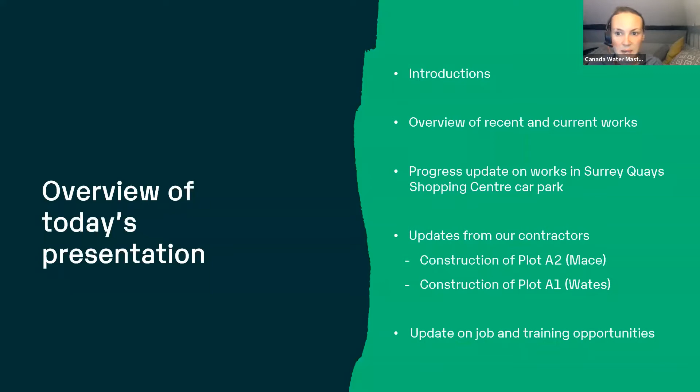I'm then going to provide an overview of recent and current works and let you know what's been going on in Surrey Quays Shopping Centre car park over recent weeks. At that point, I'll hand over to Emmeline from Mace and then Ollie from Wates. They'll give you an update in more detail on the construction of plots A2 and A1 of the Canada Water Development.

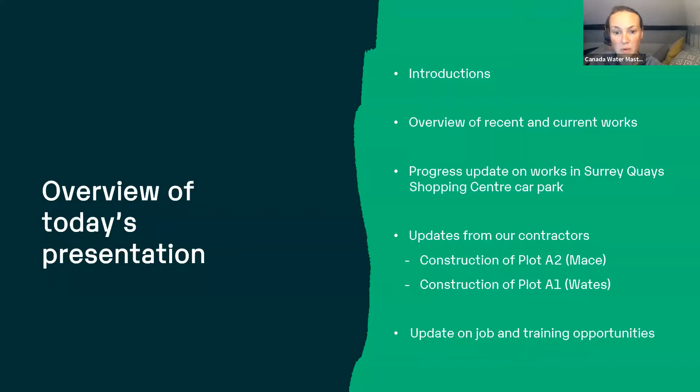In terms of who we are this evening, my name's Sarah Ward. I'm the Construction Neighbour Liaison Manager for the Canada Water Development on behalf of British Land. My role is to work with our contractors, of which there are quite a number, and more will come to site over the coming years, to really make sure that we're communicating and liaising with the community in the best way that we can. That includes our immediate site neighbours, the wider community who are passing through the area or using the area for facilities, and those who are just generally interested in what we're up to.

In addition, in the event that an issue or a concern or a question arises, I answer it as best as I can, and when I need to, I speak with our contractors and I make sure you get a quick reply, and if there is a concern or an issue, that it is dealt with quickly.

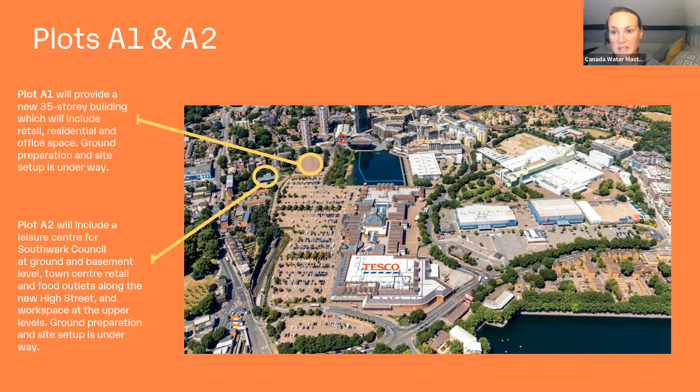In terms of the wider Canada Water Development works, you may be aware that the former Rotherhithe Police Station demolition was completed in July of this year. Moving down to where the interim petrol station is, you may be aware that that opened in June and is now operating as a fully functioning petrol station. Over to the right-hand side, top of the screen, you have plot K1, which is near Alfred Salter Primary School and off Roberts Close. We expect the construction of that building to begin either later this month or in November, and there are 79 affordable homes being delivered there.

If we move down now to Printworks and we just cross over the street there, we've got Goldris working there. They have been for some time, and they're building a basement for a below-ground electricity substation for UKPN. Then moving down right to the right-hand bottom of the screen, you may be aware that TEDI London are now operating a higher education campus. They took their first intake of students and they've been open since last month.

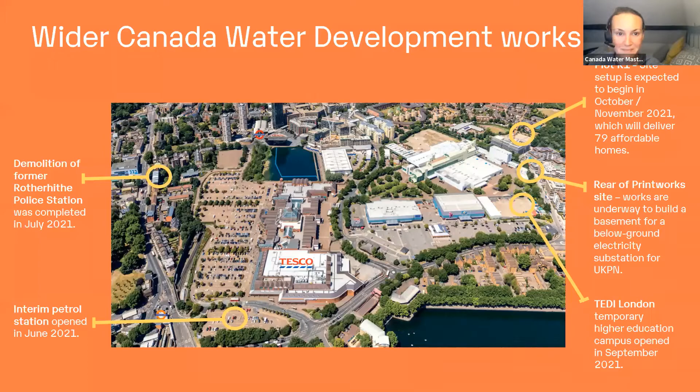Now to talk briefly about the works in Surrey Quays Shopping Centre car park. First of all, we'd like to thank you for your patience whilst these works have taken place. You may be aware that this week, Mace and Wates have been installing hoarding along Deal Porter's Way and around the rest of their sites, permanent hoarding that will be in place for the duration of the build for plots A1 and A2. You may also be aware that since Monday, the entry-exit point, which is close to Canada Water Library on Surrey Quays Road, Deal Porter's Way Junction, has been exit only. Actually overnight, tonight and tomorrow, it's closed to remove barriers. Again, we thank you for your patience here. That will be reopened, we hope by Saturday, but certainly by the beginning of next week.

In terms of pedestrians, of which many pass through the shopping centre car park, you may be aware if you walk through the site that the reopened footpath along the edge of the dock is being used to full effect now.

We do still have some barriers in place, and you may have seen that we've got seating still to install, benches. We'll share more on that as soon as we can, but we're expecting that to take place at the beginning of November.

The final update here is around footpath resurfacing works. At the bottom of plot A2, which is near Hothfield Place, we've been undertaking some resurfacing works there. We've retained access to Hothfield Place, and again, we thank you for your patience whilst the diversion has been in place.

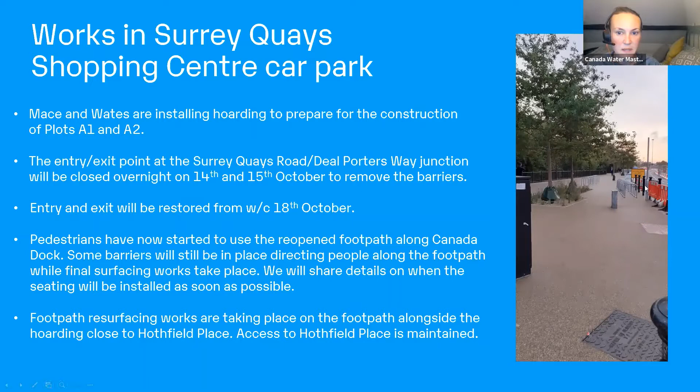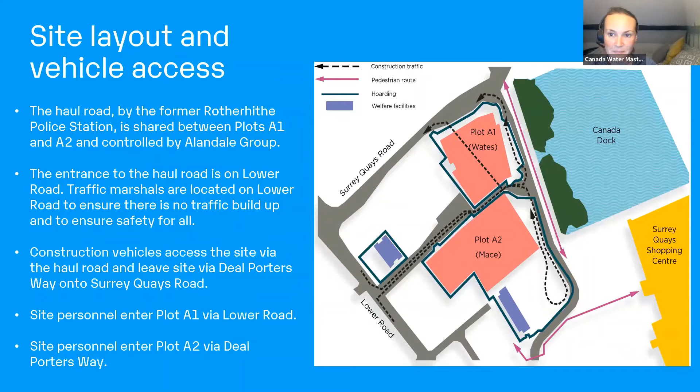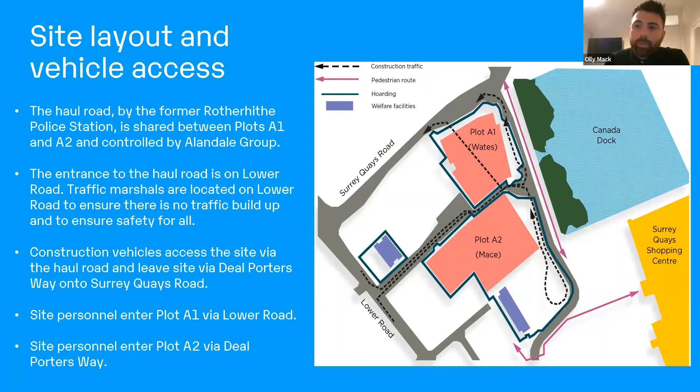Good evening, I'm Ollie Mack. I'm the project manager for Wates Construction, and we'll be undergoing the work of plot A1. I'm going to take you briefly through the logistics for both A1 and A2.

As you can see on the image on your screen, the top right plot, which is highlighted, will be the Wates Construction site of A1, and south of that is plot A2. The overall logistics is run by a haulage road, which runs between Lower Road and Porters Way. Construction traffic entering via Lower Road, between us and Mace, will travel up the road and will exit either left into the Wates Construction site or right into Mace.

As Sarah's mentioned in the other slides, there's currently a hoarding going up on Porters Way, segregating public traffic and pedestrians from the sites to maintain security throughout the build. Construction vehicles leaving both sites will exit via Porters Way onto Surrey Quays Road, turning left.

Site personnel for plot A1 will enter via Lower Road at the bottom of the screen, and there'll be a welfare set up there on the site of the former Rotherhithe police station. For plot A2, site personnel and visitors will enter via Porters Way, which is located at the bottom right of the image you can see.

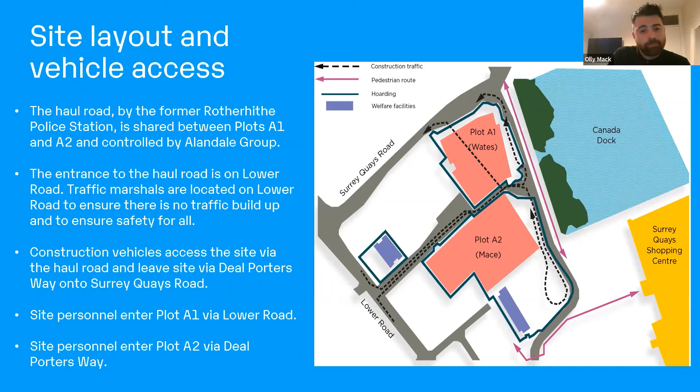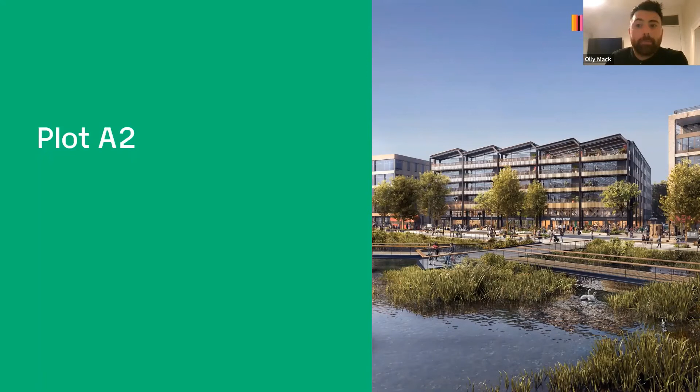Thanks, Olly. Good evening. I'm Emmaleen Mayell, Community and Skills Manager at Mace, and I'm supporting Neighbourhood Liaison and Communications for plot A2. We took over the site at plot A2 at the start of October from Calbray, and they continue to work on the site as a subcontractor, with Mace as the principal contractor responsible for delivery here.

As Sarah already mentioned, plot A2 will provide some commercial office space, retail and hospitality units, and a leisure centre for Southwark Council, including a swimming pool.

We have a small team on site at the moment, and this will grow over the next couple of months as our site welfare facilities are constructed to the south of the site. These will be fully established by January, and the majority of our project team will be working on site full-time from early next year. Next slide, please.

So the current activity on the site: we started piling works Monday of last week. A brief overview of what that involves is drilling into the ground to create foundations for the structure of the building broadly. This can result in a little bit of noise, dust, and vibration in the immediate vicinity, and we try to mitigate against this as much as practicable.

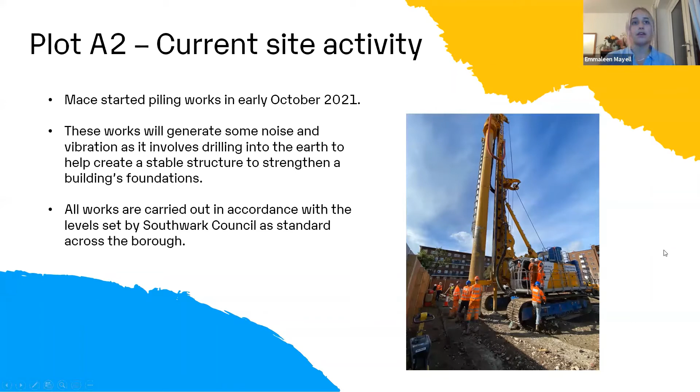Looking ahead for plot A2, piling works will continue into the new year. We'll start bulk excavation in January as well, with new plant on site to do this, as well as lorries to remove the excavated materials.

We're also erecting tower cranes in February of next year, shown as the 3 green dots on that plan there. These will be operational throughout construction, up until 2024.

We've also briefly mentioned some of our community engagement activities. Alongside British Land, we'll be delivering initiatives for the duration of our time at Canada Water, including community investment, fundraising and educational activities, as well as engaging local people around skills and employment. Our first initiative is a site visit with students from Bacon's College, a local college, organised through the Construction Youth Trust.

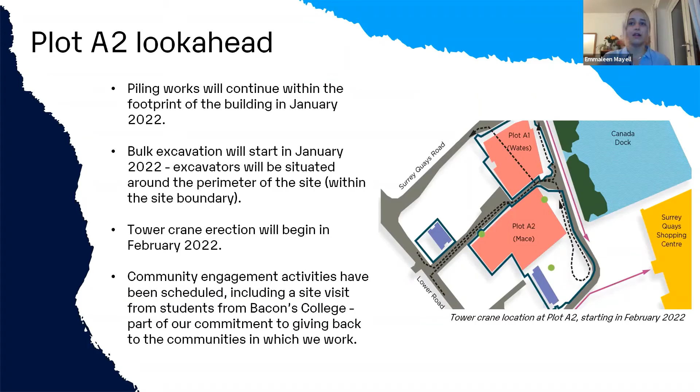We'll keep the community up to date with any upcoming activities via our notice board and other Canada Water communication channels. Thank you, and I'm just going to hand back to Olly again to go through plot A1 with you.

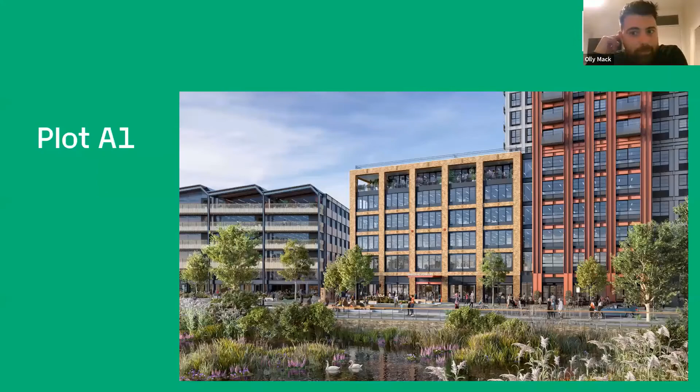Just an overview similar to what Emmaleen presented there for A1. We've commenced on site as of September 21, and our completion date will be October 24. As you can see, the project includes 186 residential apartments over a 35-storey tower, including 178 homes for private sale and 8 homes for shared ownership.

Following the residential tower, there will also be 3 cores of 6-storey commercial space and retail at the lower levels. There's a shared single basement spanning the whole site between the residential and commercial blocks. The 4 retail spaces will be around the surrounding section of the bottom ground floor.

Next slide, please. For upcoming work, similar to Mace, Wates are currently preparing the foundations for our welfare facilities, which will be located on the former site of the Rotherhithe Police Station, as mentioned previously. We will also begin piling works at the end of October, using exactly the same system as Mace in terms of what we're doing with the piling.

Again, it does generate some noise and vibration, and we're following the same guidance from Southwark Council in terms of environmental monitoring. We have a joined-up approach with Mace and other contractors on how that's managed and monitored, and the works are carried out in accordance with the levels that are set.

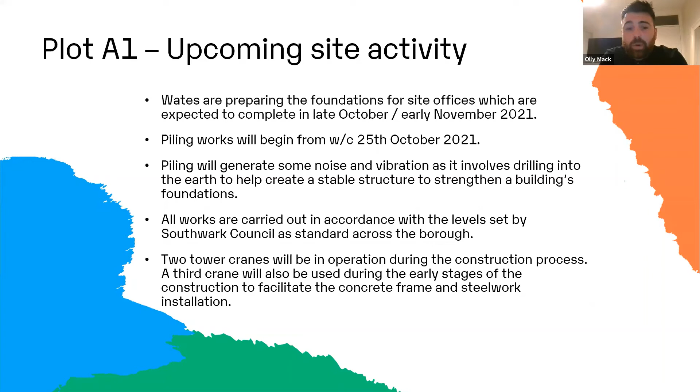This slide just depicts where the welfare facility is going to be located, at the old Rotherhithe Police Station on Lower Road. This will be a 3-storey temporary cabin setup, and this is where all of the Wates staff and visitors will enter the site via Lower Road.

Again, to limit the impact we're having on the community, we're having no parking at all, and we have supply chain and our staff using public transport, or where possible bicycles, etc., to get to the office and get to work.

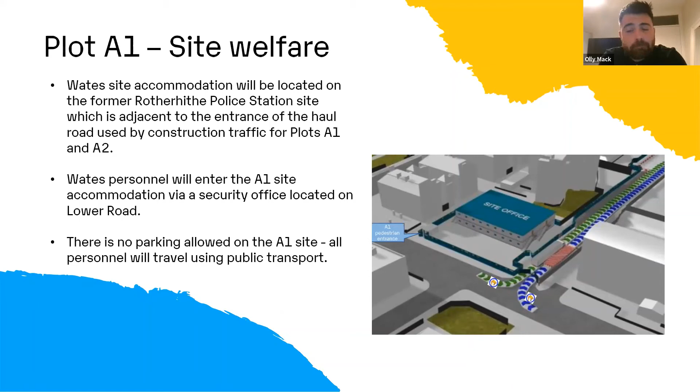I just wanted to talk a little bit now about our common working practices, around our working hours and our environmental monitoring. We're working standard construction working hours in Canada Water, Monday to Friday between 8 and 6, and on a Saturday between 8 and 2, with no noisy works before 9. We do try to avoid Saturday working as far as practical.

In terms of communicating where things may happen out of hours, that might be delivery of a large machine, for example, that's required under police escort at a particular time of day, usually to avoid peak periods, or when construction activity is such that once it's started, it can't stop. These are rare occasions, but it does happen on occasion.

We do update our working hours post, which is on our website. We are conscious that not everyone has access to the internet, so as far as we can, we use our site signage as well, so people will see that if they're passing. We provide advance warning if we can in writing through newsletters and so on, particularly for our immediate neighbours. And if we're affecting a large number of people, we would share it on our social media channels as well, so that would tend to be on Twitter and Facebook.

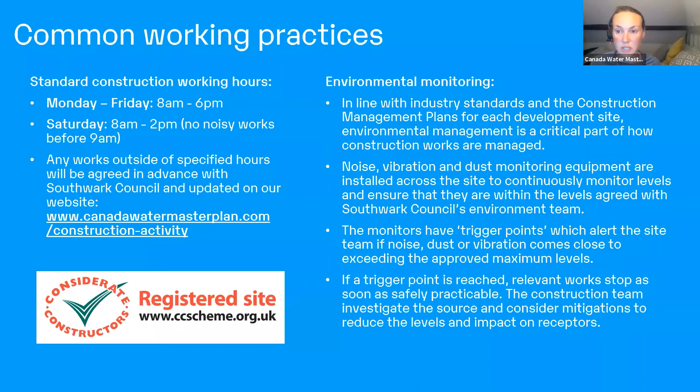We've got live monitoring equipment all over the site in terms of where live construction is taking place. What happens is if site activity, be it dust, noise or vibration, reaches a level that isn't acceptable or is coming close to that, then the team on site will receive an immediate notification, at which point they will take action to make sure the levels reduce and we stay within what is approved. So it really is a live process that is handled by the site teams.

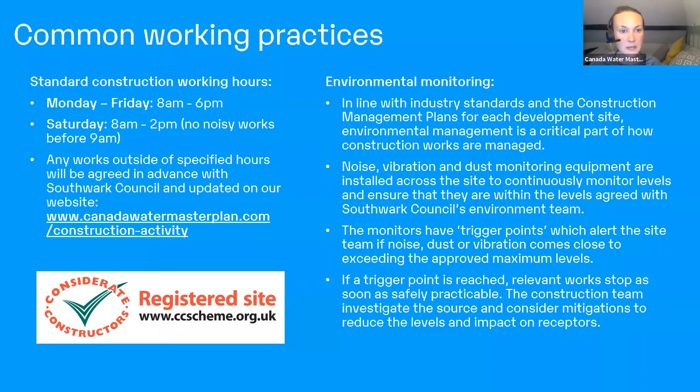Just wanted to wrap up by talking a little bit about jobs and training opportunities. There will be more of these as construction develops, but certainly for now, we would just ask that anyone who would like to register for our updates or hear more around the jobs and training opportunities that are provided as part of this development activity would just get in touch with us. We're happy to talk you through it.

There's more information on our website. I know for certain that there are some live job adverts out at the moment for Mace, and they're detailed there on the screen. We will be sending specific job related emails to those that have signed up, which coincides with British Land's commitment to create sustainable employment for those who live in the local area.

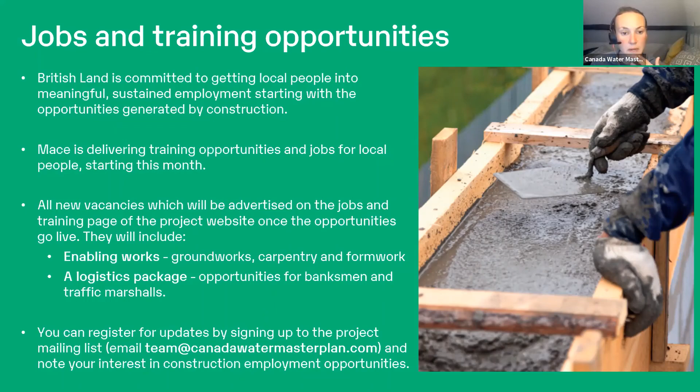And just bringing this evening's meeting now to a close, we're always keen to learn from the community on how you want to receive information. We're always mindful of those who want information online, want it in live time, want to be able to watch it back, and those who don't have access to the internet or just don't want to attend a Zoom, or may have low internet speeds or limited access or whatever that might be. So we're very keen to hear feedback on how you wish to be kept informed.

In terms of what we've got coming up, the date will be advertised shortly along with the location, but Wates and Mace will be making themselves available in an informal setting at a location at a set time each month, where the community can come along, have a hot drink or a cold drink, bite to eat and ask questions. So informal, a conversation. We'll be advertising that via our e-newsletter on our website and again via site signage. We also have our quarterly printed newsletter.

The second one we issued just last month, providing a whole raft of information about development activity on the site. Again, we're keen to hear from people around the level of detail, the way we're describing things, but hopefully we're providing information in an accessible way.